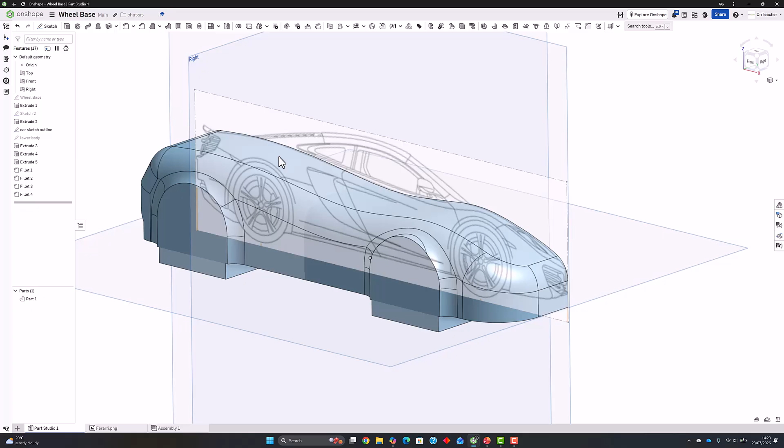Welcome back to part 4 of the OnTeacher collaboration with Scalextric4Schools. We're now working on the body, which we created in part 3.

In part 4, we're going to add the roof, using the same method as with the lower part of the body, except we won't extrude it quite as far. So it's back to sketch.

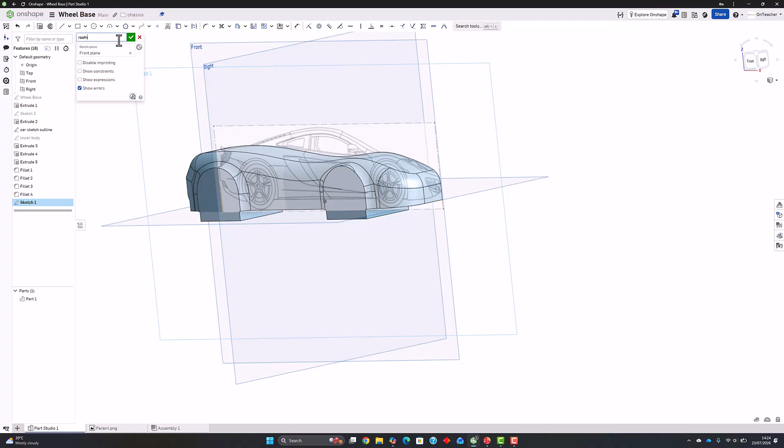We're going to click on front. I'll name it roof, just so we know what we're sketching on, and press the Enter key. I'm going to use the spline tool again for this one.

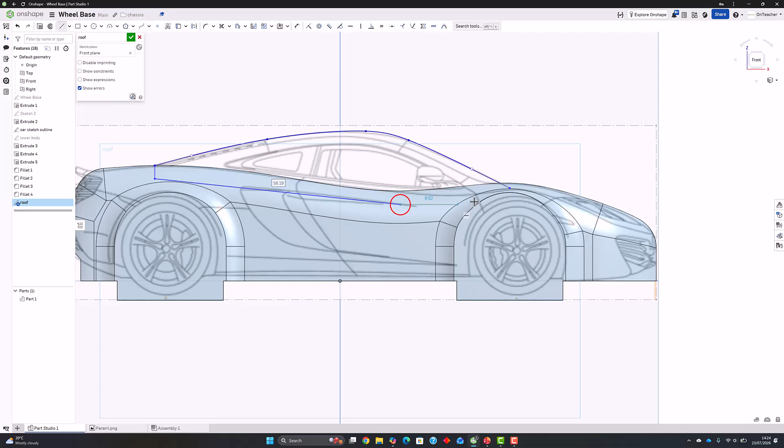I'm going to pick a point about there and curve this around my roof. Now I double click there to finish it. It's important afterwards that we make sure our roof line goes well into the body, so they intersect each other.

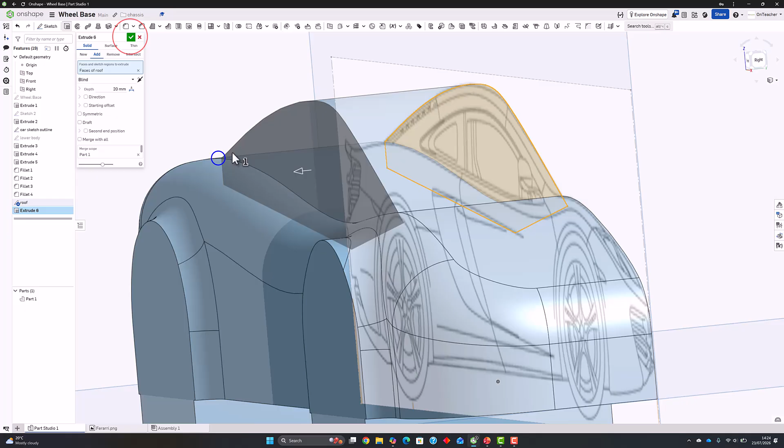So we press the tick, press extrude, click on roof, and drag that through roughly to about the same distance as my curve there, which is 20. I can press the tick.

Now I'm going to round or fillet this top line, and we'll keep that to 5. Now that is the basis for the car body.

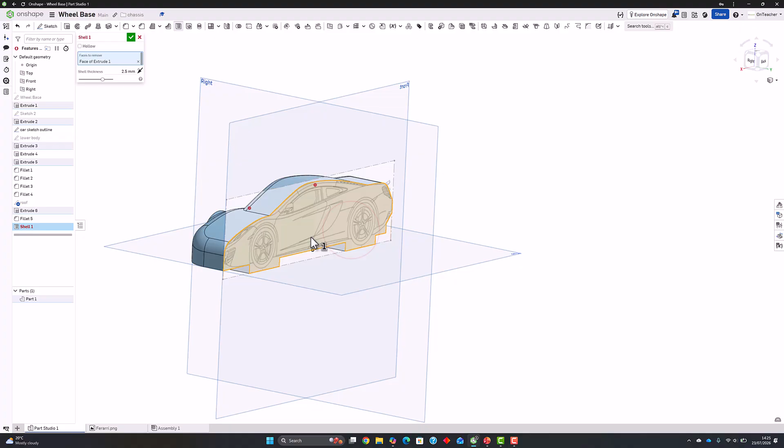What we need to do now is shell it. So we click shell, click this side here, and then we see that we've got a few errors. We might have to go back and change some bits.

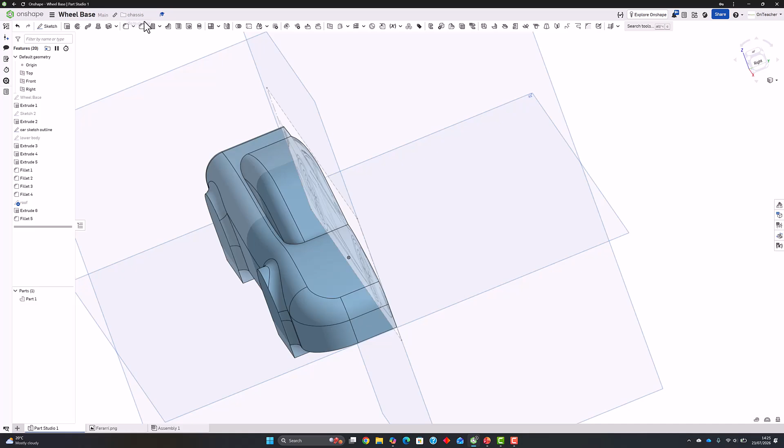Okay, so it's not liking that for the moment, so we'll show you how to fix it. To fix it, I'm going to go to this extrude and make it 19, and just see if that will allow the shell to take place this time.

There we go. I would normally do these about 1.75 thickness, and press the tick. Now that's the body shelled out.

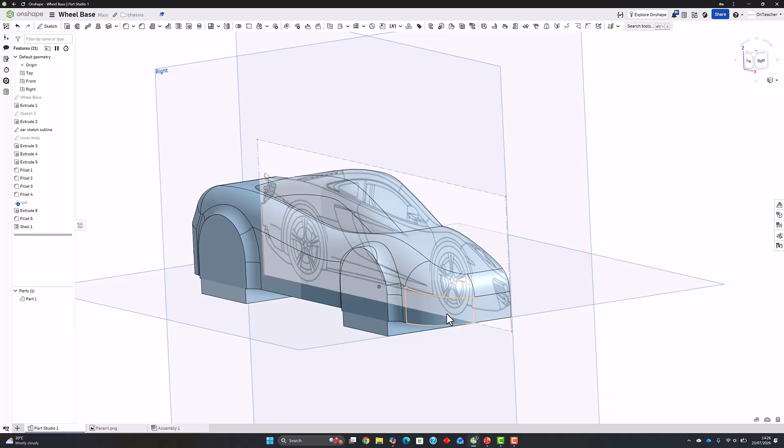In the next episode, we're going to look at how we can add some detail to this—grills, doors, cutouts, some basic things, lights might be added—but we're going to get the cutouts for the wheels done first, and then look at what else we can do with windows and things like that.